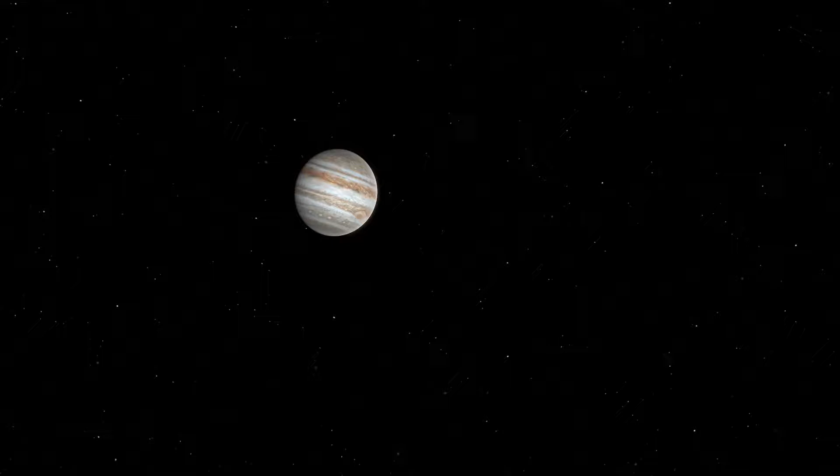The Europa Rocket is Project Jupiter's entry in Spaceport America 2021 and represents the biggest technological leap the project has ever taken since its inception in 2015. Europa's design has been in development since 2019, and it was originally intended for SA Cup 2020. In the aftermath of the event's cancellation, it was later improved for Latin America Space Challenge 2020, allowing the team to score 3 different awards including Overall Winner and Technical Excellency.

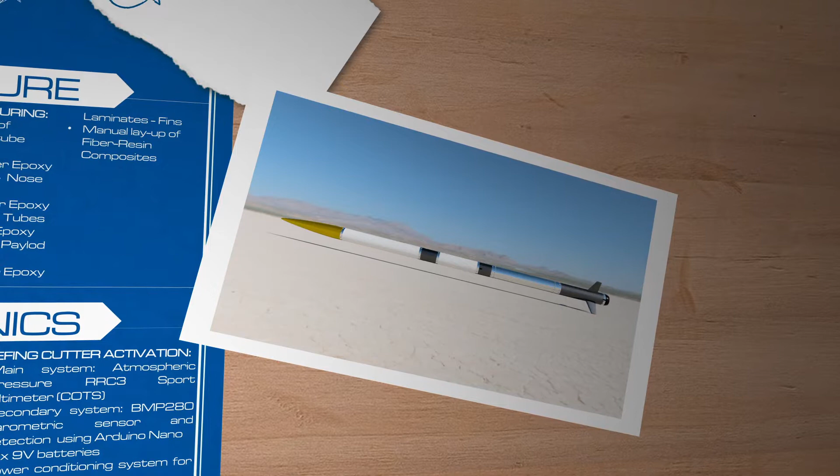For SA Cup 2021, a lot of changes and upgrades were made, including better electronics, a larger payload, improved aerodynamics, among other things. Europa is a 3.5 meters long rocket with a diameter of 5 inches. Its fuselage can be separated into 7 different parts: a carbon fiber nose cone, followed by 4 different modules, a hybrid motor, and fins. In the rear section, the motor external structure is visible, being part of the fuselage.

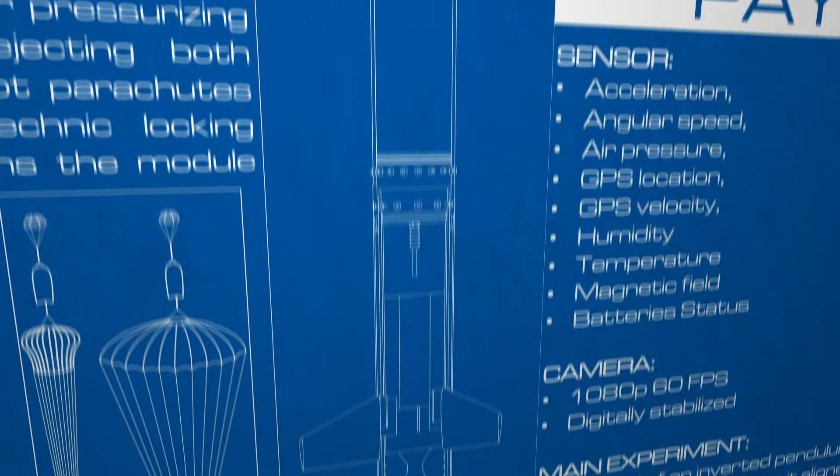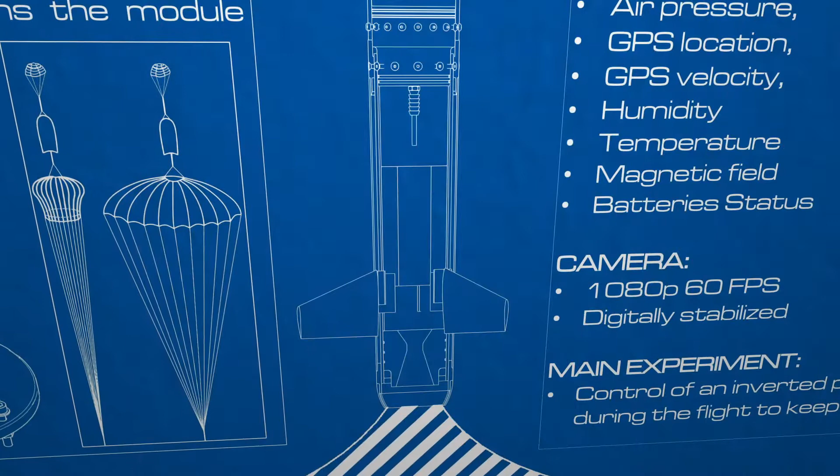The nose cone was optimized to minimize drag in subsonic and transonic regimes, using a von Karman shape. Each of the tubes is hand-built, using a lamination process with epoxy resin and carbon fiber. The fins were also enhanced to minimize drag. They have a NACA 0012 airfoil section applied to a trapezoidal shape, giving the rocket a stability margin of 2 calibers. Finally, there's a circular arc-shaped tail to minimize drag.

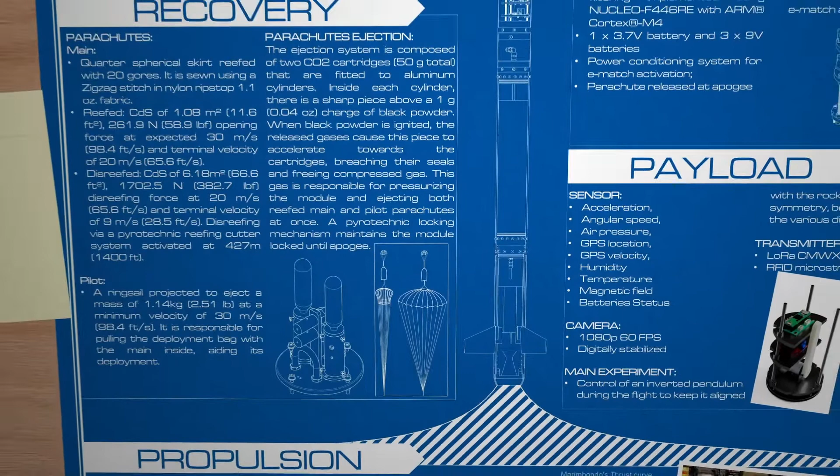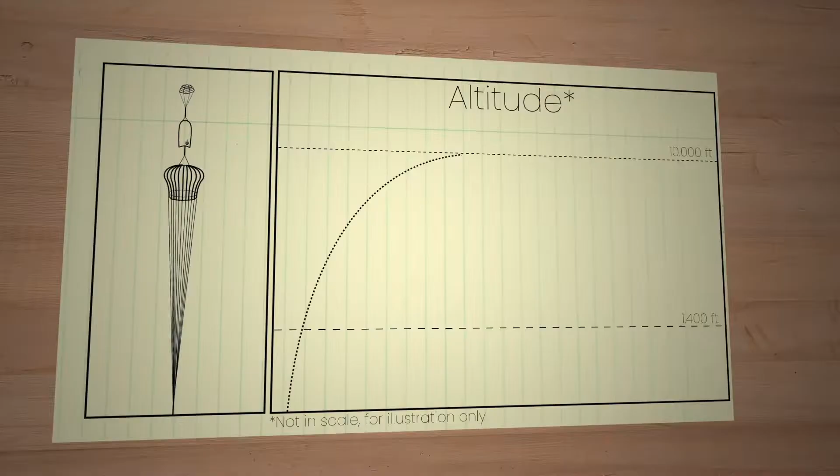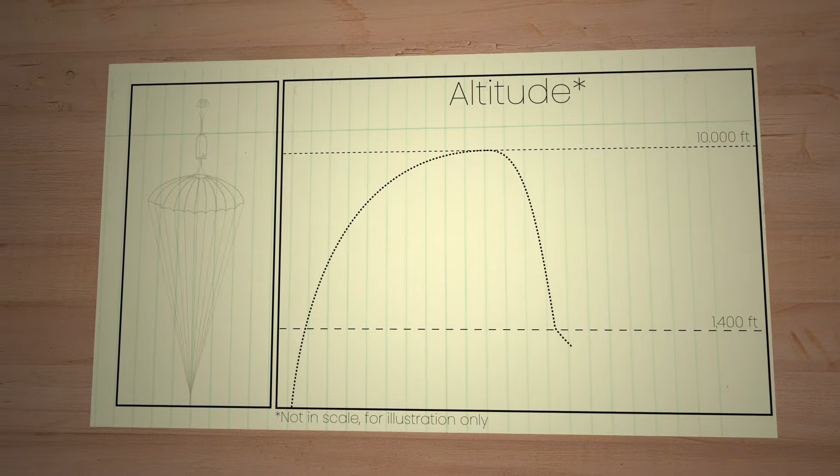Unlike previous rockets, which counted with 2 parachutes, a main and a drogue, Europa will have a single reefed quarter-spherical main parachute and a pilot chute. The pilot is attached to the main's deployment bag, aiding its ejection. At apogee, the main will be reefed, with a diameter limited by the reefing line. Its total drag is reduced, and the rocket speed decreases with more stability at high altitudes. As the altitude decreases, and the rocket reaches a predetermined level of 1400 feet, our reefing cutter is activated, cutting the reefing line and allowing the main chute to achieve its total drag, greatly reducing the vertical speed until ground level.

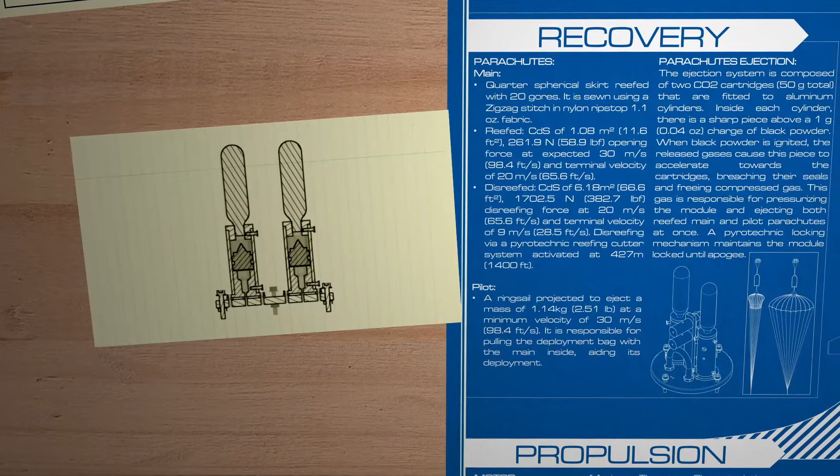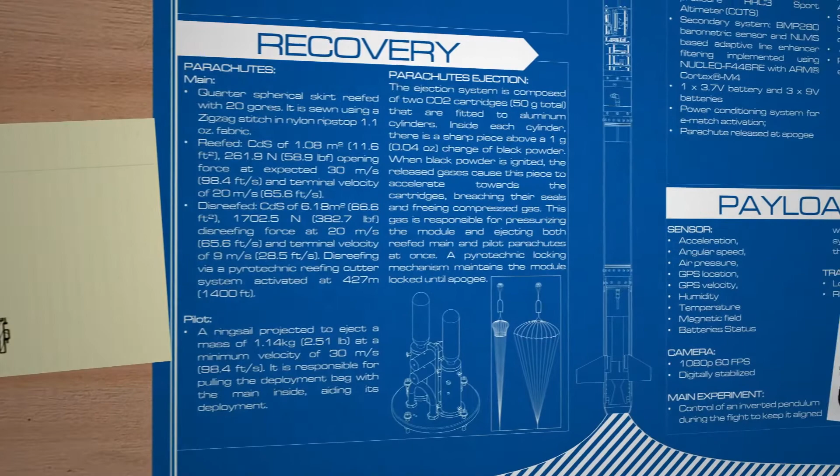The parachute's ejection system is composed of a pair of 25-gram CO2 cartridges fitted to aluminum cylinders. Inside each of the cylinders, there's a puncture and a small charge of black powder. At apogee, the black powder is ignited, and the punctures break each of the cartridge seals, freeing the compressed gas, pressurizing the module, and separating the rocket nose cone from the rest of the fuselage, ejecting both the main and the pilot chutes at once. The ejection system was already tested many times before, including in-flight tests. The reefing system was also tested in-flight in our rocket Themisto, although some improvements still need to be tested.

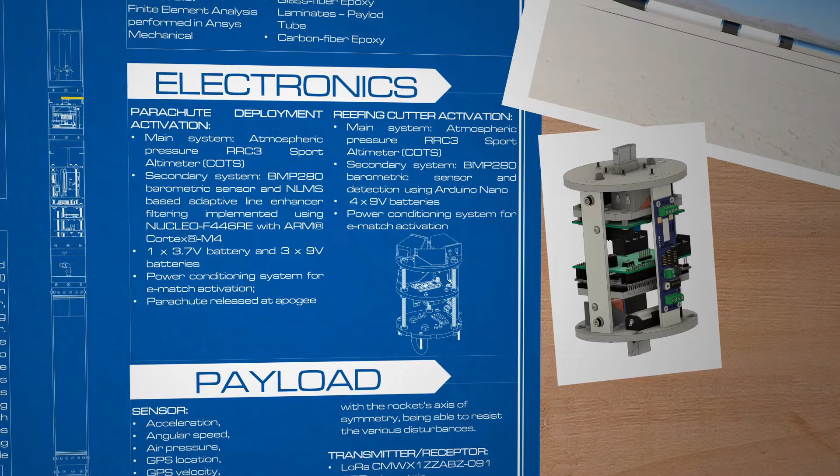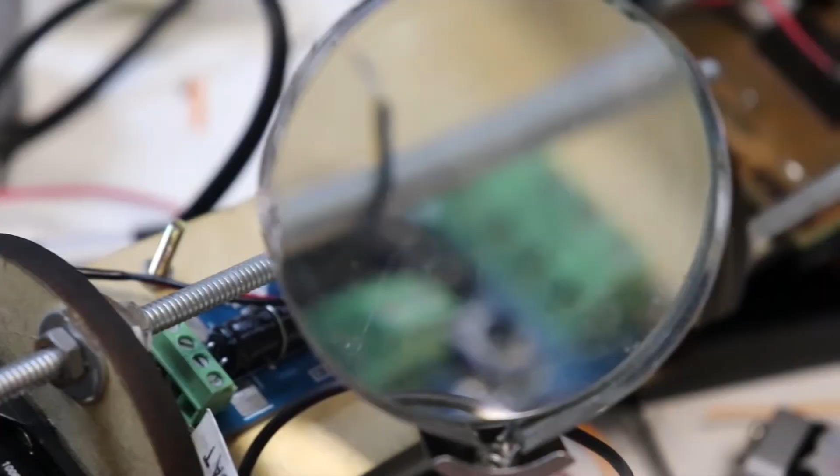The electronic subsystems are responsible for detecting the correct moment to activate the ejection system and to trigger the disreefing of the parachute. Its structure is divided accordingly into those 2 individual parts. The first part is located below the parachute ejection system and takes care of the initial parachute opening. It contains 2 redundant altimeters to detect apogee with high reliability. The primary system is a commercial off-the-shelf RRC3 altimeter, and the secondary system was developed by the team and counts with a BMP 280 barometer and an STM32 that runs a normalized least mean square adaptive filter to calculate the apogee. Both systems have already been tested in previous flights and have succeeded.

The second job of the electronic subsystems is to start the main parachute disreefing. The reefing cutter is divided into 2 parts, the activation system and the cutter itself. On the one hand, the activation system, which is placed inside the nose cone, contains the detection electronics, an RRC3 and a SRAD detector that operates redundantly. On the other hand, the cutter itself counts with a combustion chamber, through which the reefing line passes and is attached to the main riser. The student researched and developed detector contains a BMP 280 sensor and an Arduino Nano to perform the calculations needed.

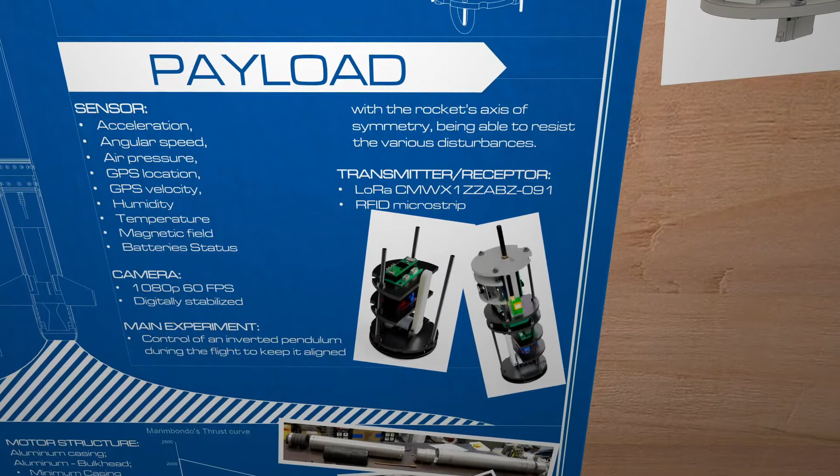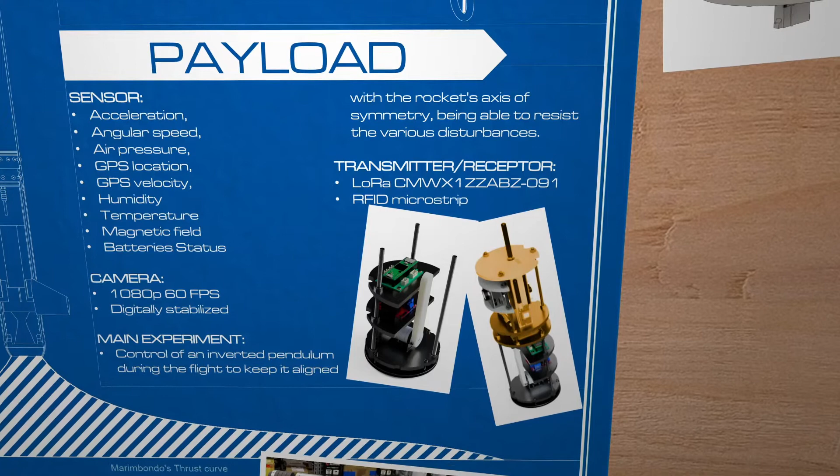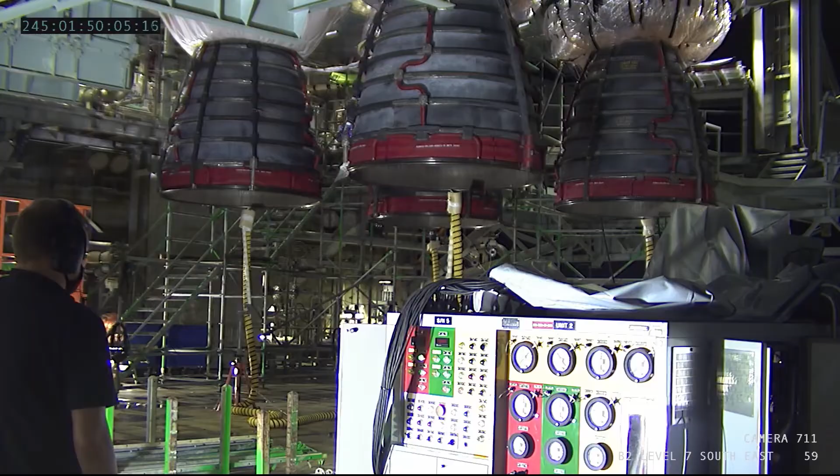Below the electronics, there's the payload module, whose structure is easily removable from the rocket. It weighs 4.3 kilograms and carries 3 major parts. First, there's the telemetry system that captures and transmits data on acceleration, angular speed, air pressure, GPS location, among other parameters. The second system is a camera, which records the flight. Finally, there's the main experiment, which is a controlled inverted pendulum. This experiment was chosen for the notable importance of control in space systems.

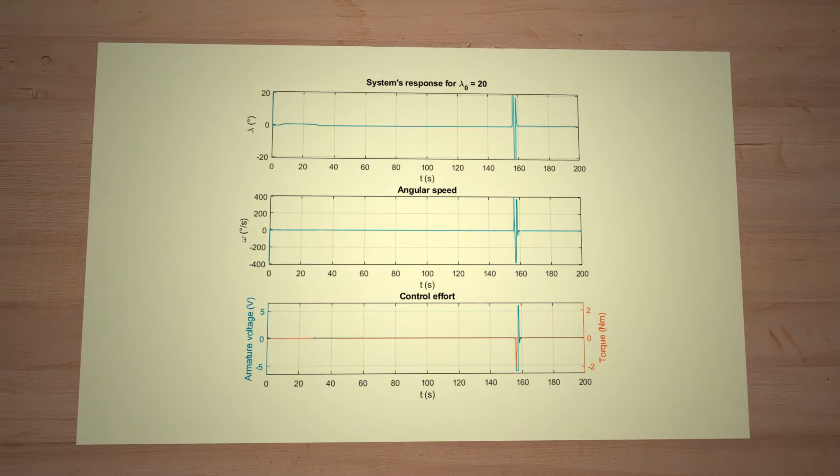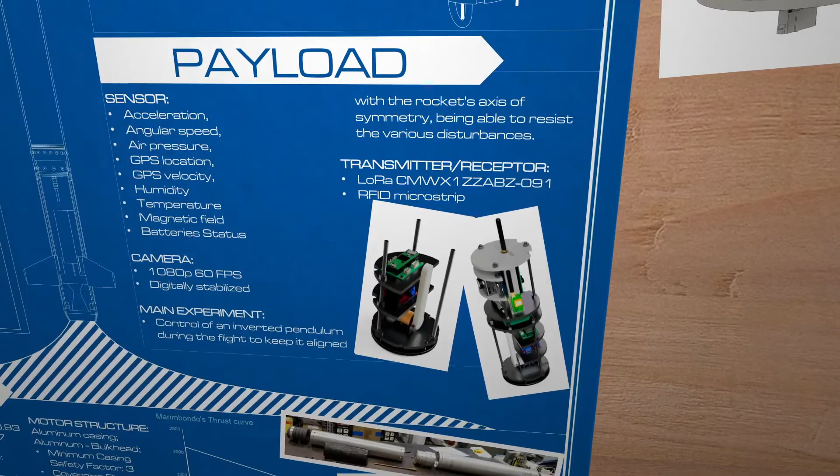For this reason, it was envisioned with the aim to promote and provide aid for future control projects that the team wants to develop. For example, it should provide a clear vision of the disturbances any control system on board the rocket would have to withstand. Its main goal is to keep the pendulum in a position perpendicular to the module's structure, and therefore align it with the radial symmetry axis of the rocket. For it to work, the team not only modeled the dynamics, but also projected a continuous time controller, which was later converted to discrete time. The control algorithms are implemented in a microcontroller, which controls the pendulum through the use of a DC motor. Finally, it's worth mentioning that, although the experiment involves movement during the flight, it's not expected to affect the rocket's flight dynamics in any way.

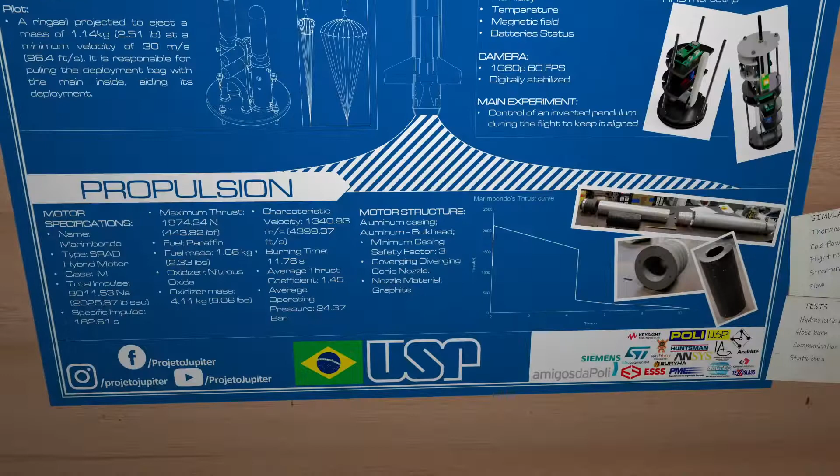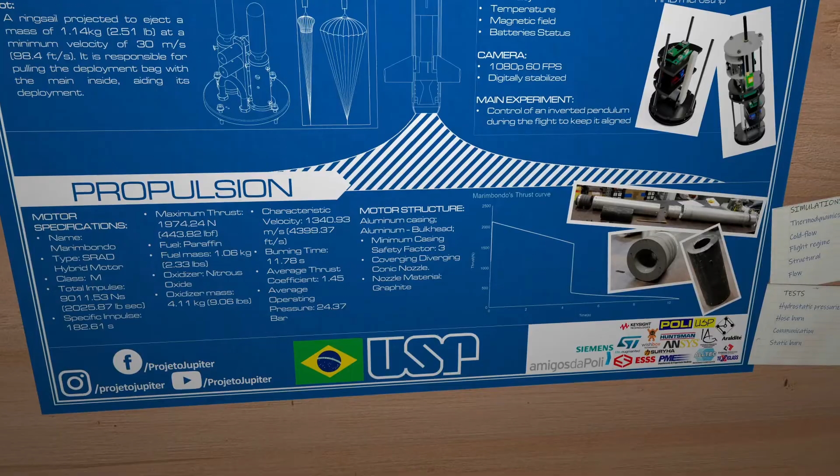Europa's hybrid motor, named Marimbondo, is an M-class motor of paraffin and nitrous oxide, and represents the final result of over 3 years of development. Essentially, the engine can be divided into two segments, the oxidizer tank and the combustion chamber. On top of the oxidizer tank is connected the bulkhead with the venting system. On the bottom goes the injector, with a direct connection to the combustion chamber. As the oxidizer goes through the injector and enters in contact with the paraffin, the burn will be maintained. The expanded gases in the combustion chamber will then be expelled through the graphite nozzle.

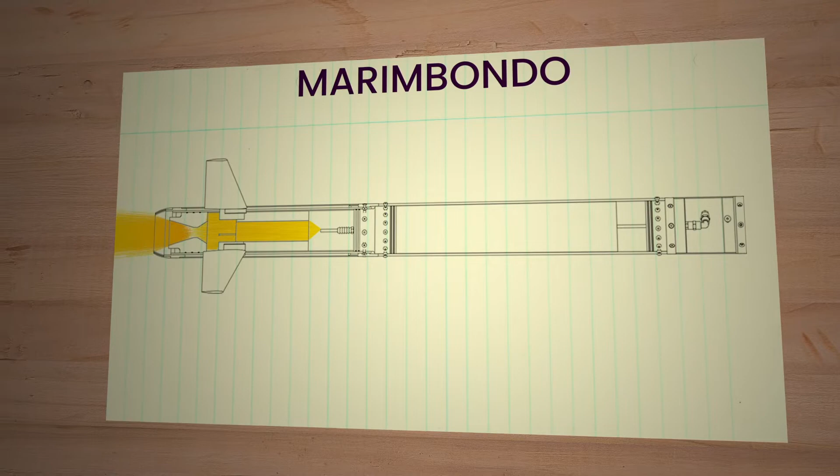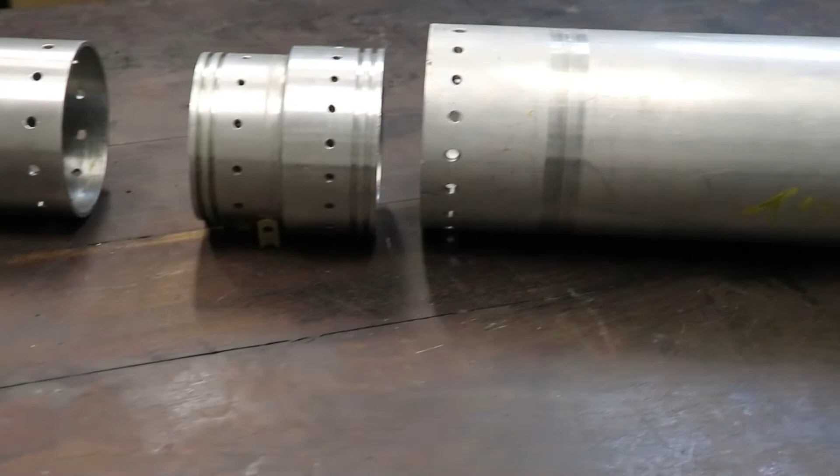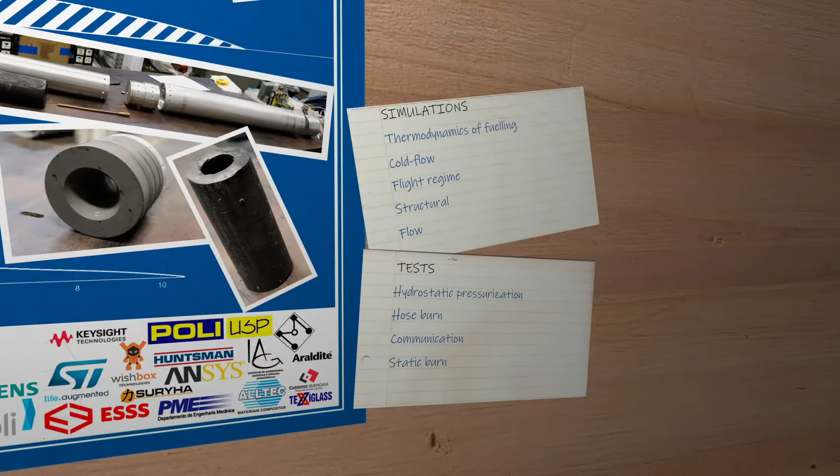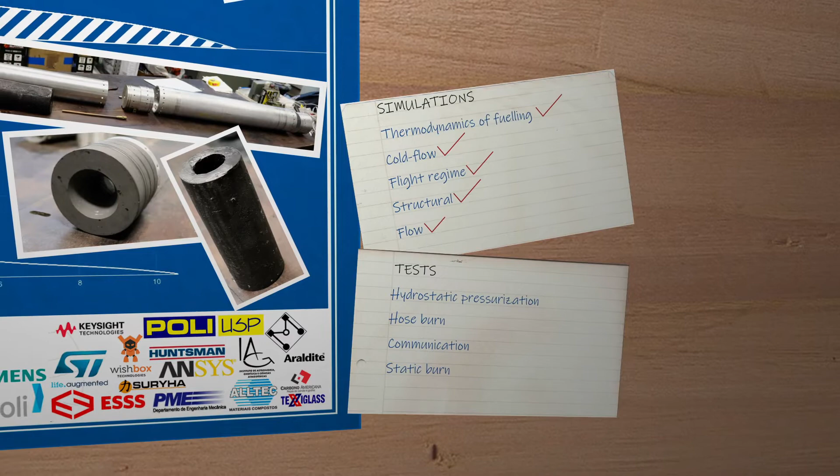During the fueling process, as the oxidizer is being fed, the feeding tank and the injector are connected by a feeding line, ending in a polymer hose wrapped by a solid propellant grain. After the ending of the feeding procedure, the grain is ignited, allowing the oxidizer to flow towards the combustion chamber and initiating the burn. The motor has been thoroughly tested and analyzed. The overall thermodynamic process of fueling, the cold flow, and the flight regime were simulated using in-house software. The structural and flow simulations were done using finite element software. The hydrostatic pressurization, hose burn, and communication tests were completed. For the static tests, new installations were built on the USP campus of Pirassununga, but as the quarantine started just a couple of weeks before the test, it has been postponed indefinitely.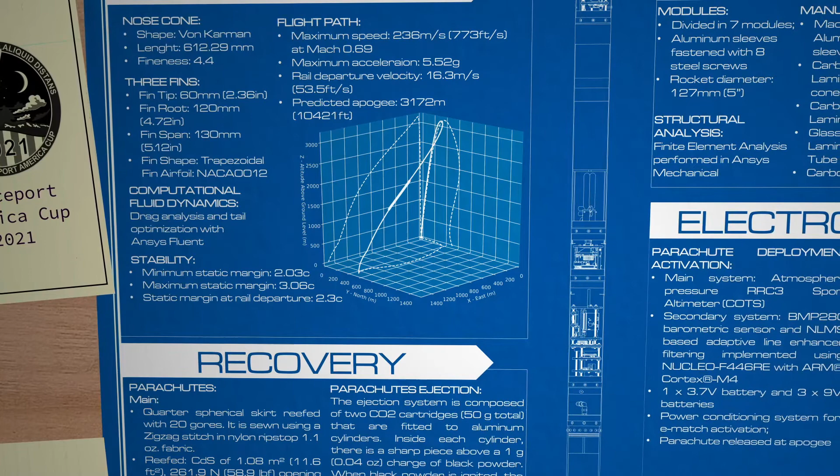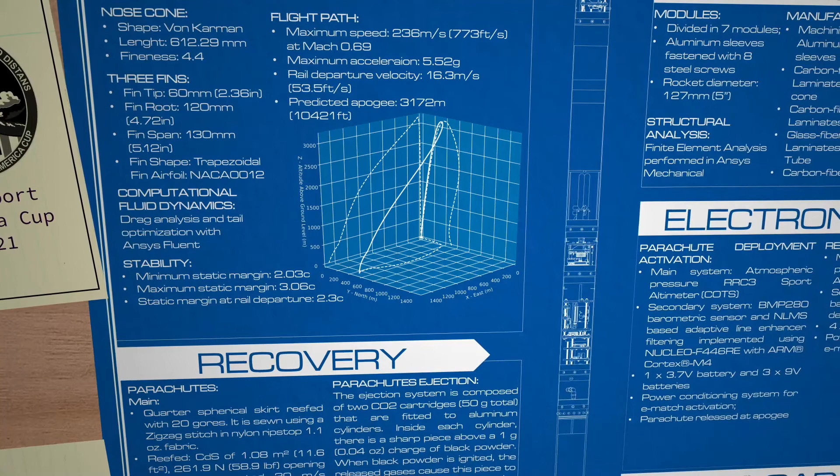The trajectory of the rocket was simulated using RocketPy, an in-house software. Europa has a predicted apogee of 10,421 feet, achieving it at T plus 27.3 seconds. Its maximum velocity is 773 feet per second at approximately 0.7 Mach with a maximum acceleration of 5.5 Gs. So that was the poster session and a quick overview of Europa, Project Jupiter's next rocket.